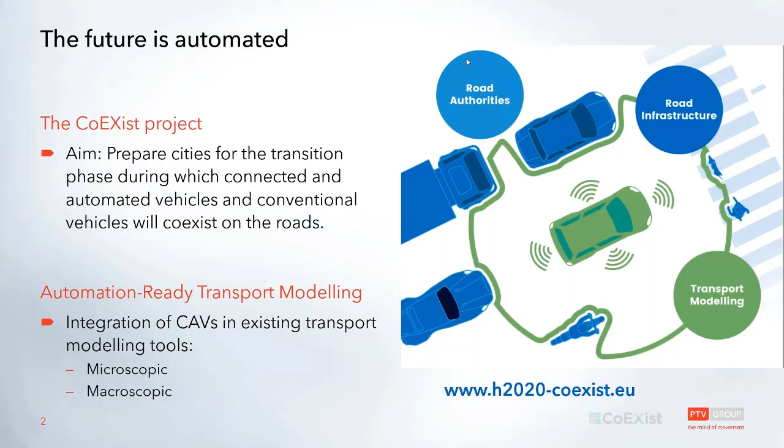Our role in the project is to enhance and improve modeling tools, both microscopic and macroscopic. In the project, we rely on 3 different information sources. First, data collection on the test track in Helmond, Netherlands, with automated vehicles performed by TASS International. Second, we received information from our project partners about expected driving behavior of automated vehicles. And third, we performed co-simulations together with the French research institute Vedecom, where an ego vehicle controlled by Vedecom's driving logic interacted with conventional vehicles provided by Vissim.

All this knowledge was used to implement new features and propose parameter values for the simulation of automated vehicles. With Vissim, we performed simulations for basic networks like simple link, on-ramp, off-ramp, lane drop, etc., and provided results for the University of Stuttgart for appropriate settings in Visum, mainly volume delay functions. After that, project cities use our software for 8 local use cases with automated vehicles.

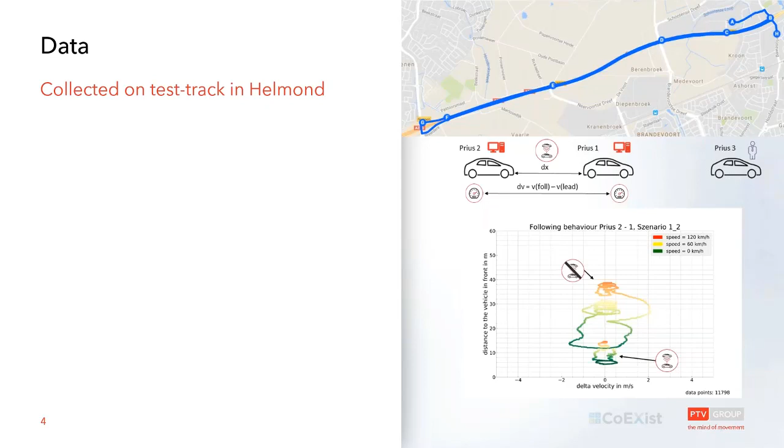The results show us that there is a linear deterministic relationship of headway and speed with car-to-car communication, an almost linear relationship of headway and speed when following a manually driven car or AV without car-to-car communication, and oscillations during the following process which are small and without much variance. With car-to-car communication, the test vehicles were able to drive safely with 0.6 or 0.3 second headway. And there is a large safety distance in drive-away behavior when there is no communication, and no stochastic variation in drive-away behavior.

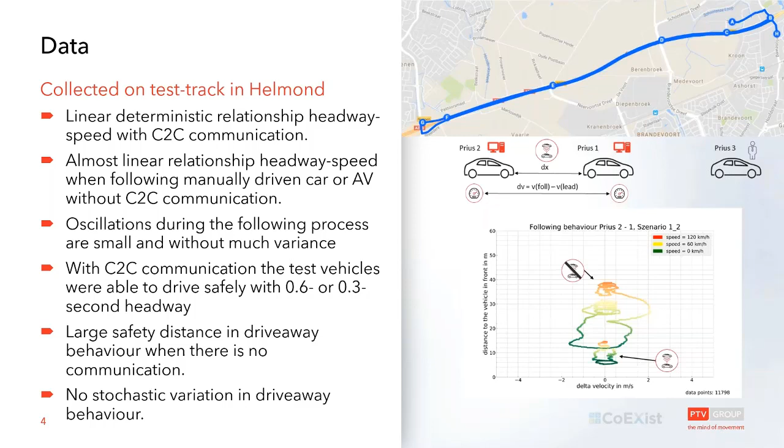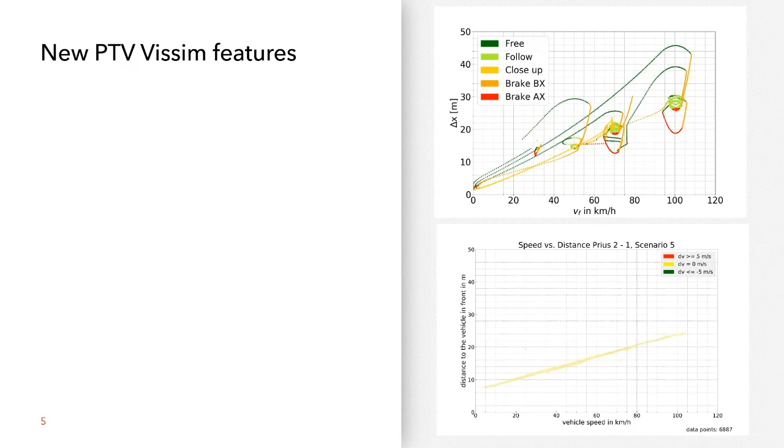The internal behavior model integrates several stochastic values indicating the spread of human behavior, which means the risk acceptance, the ability to estimate distance and speed differences, and the precision when operating the throttle and brake pedals. For AVs, deterministic values for these parameters can be assumed.

The next feature I want to talk about is sensors and equipment limitations. The idea behind it is that an automated vehicle can see the signals ahead, but only one or two vehicles in front of itself, because the sensors cannot see through the leading vehicle. In Vissim, you can specify the number of interaction vehicles and the number of interaction objects. The number of interaction vehicles is a subclass of objects. You can have situations where, because of the equipment of the automated vehicle, only the first vehicle in front of it can be seen, but not the second one.

Next feature, a big one, is platooning as a built-in feature. So you don't need scripts to have platoons inside your models. Under platoon, we understand here connected vehicles traveling very closely and safely together, possibly at high speeds. The use case is to simulate effects on general traffic, not the vehicle dynamics inside the platoon. And we assume stable driving.

We implemented also a few new behavior attributes for platooning, and you have the possibility to define platooning vehicle class specific. So you can decide if the cars will build a platoon only with cars and HGVs with HGVs only, or if you would like to have mixed platoons. Both is possible, it's up to you.

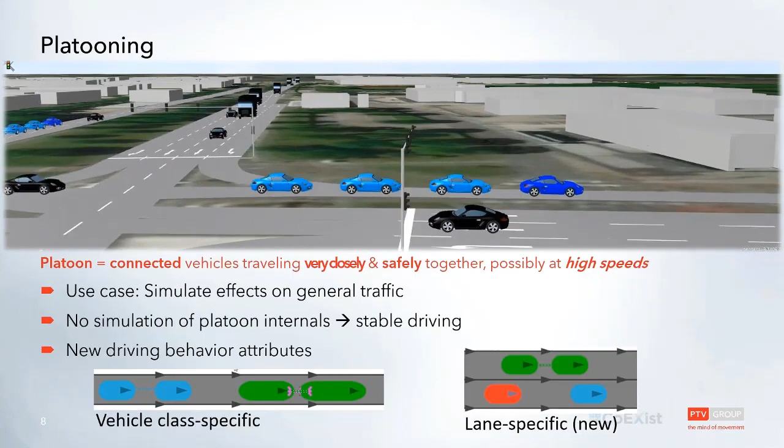It's lane specific because we implemented a new feature which allows you to define a specific driving behavior not only for each link in your model, in your network, but also for every lane on your link. So you can allow platooning only in one lane or two lanes or in all lanes in your link.

Some more details about platoons. Joining: only vehicles with the same driving behavior can form a platoon, and it's not possible for vehicles which are on public transportation or on parking routes. We implemented 5 new platooning parameters.

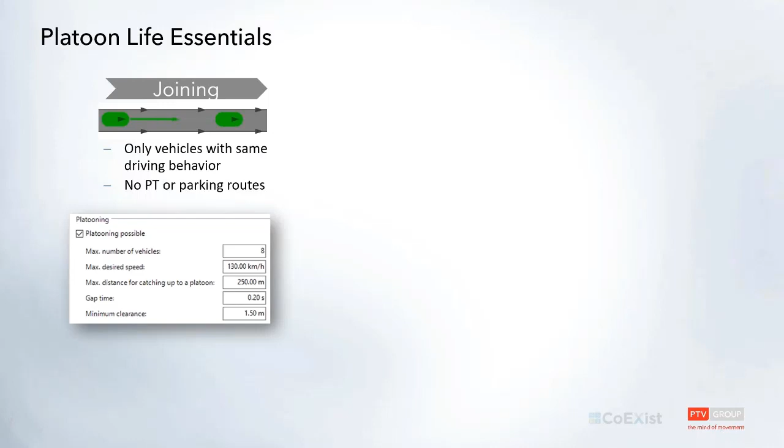First one is the maximum number of vehicles in a platoon you can set. Then you can set the maximum desired speed of the platoon. You can set the maximum distance for catching up to a platoon. You can set the gap time within a platoon and the minimum clearance within the platoon. The platoon will drive with the maximum speed you specify for the platooning or with the desired speed of the platoon leader, always with the lower of these two values.

Then driving: platoons do not do any lane changes. If a vehicle needs to change the lane, the platoon needs to be dissolved, needs to split. The vehicles keep the same distance, and there is a limited acceleration change for the platoon members. The parameters for platooning can change during driving.

When a platoon drives from one link to another link, on that second link you can have different driving behavior with different driving behavior values, so you can change the parameters or set different driving parameters for different parts in your model.

The platoon can split at signals if needed, if not all vehicles can make it on a green signal. If a vehicle needs to leave the platoon, the distance to the vehicle in front and behind will increase and the platoon will split.

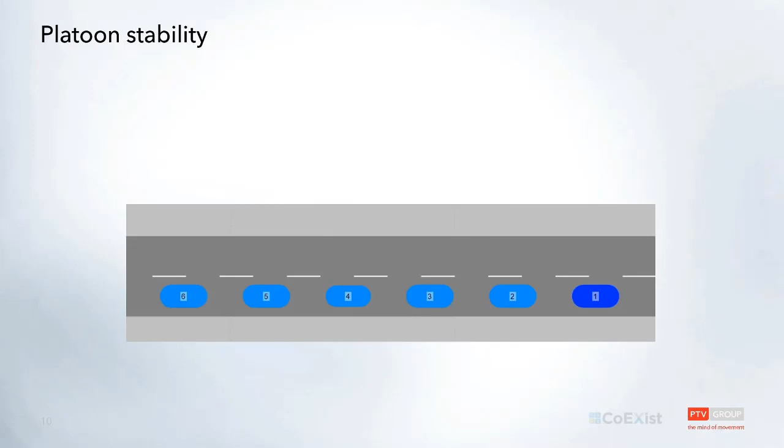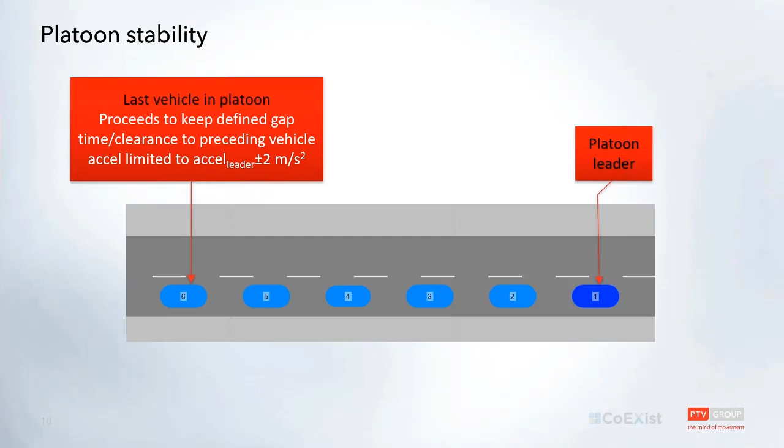How it works with the platoon stability. Each platoon has a platoon leader and the last vehicle in the platoon. And this last vehicle in the platoon proceeds to keep defined gap time and clearance to the preceding vehicle, while the acceleration for this vehicle is limited to the acceleration of the leader plus minus 2 meters per square second. And for the platoon members, these are distributed equally between the first vehicle and the last vehicle.

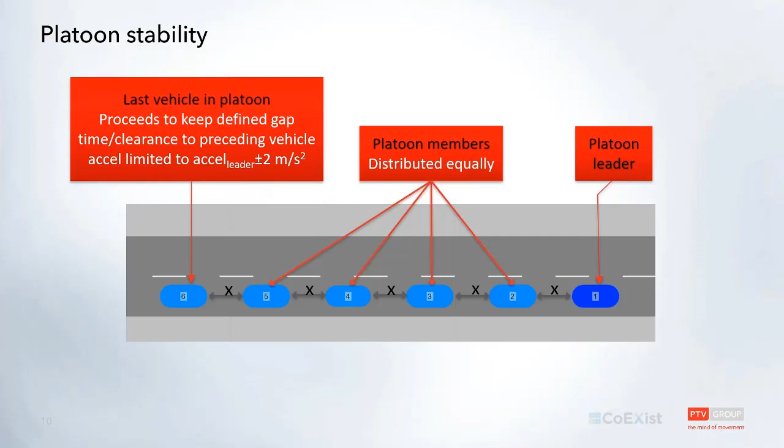And there is no explicit simulation of the communication process itself, so no packet sending or dealing with the latency like you have in the real world. We assume stable driving.

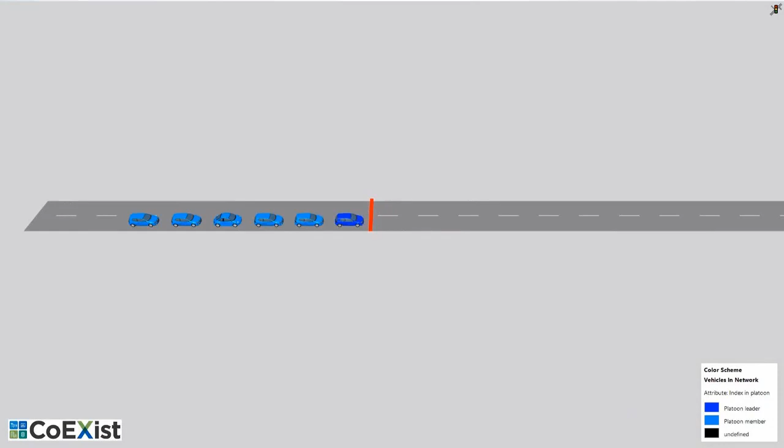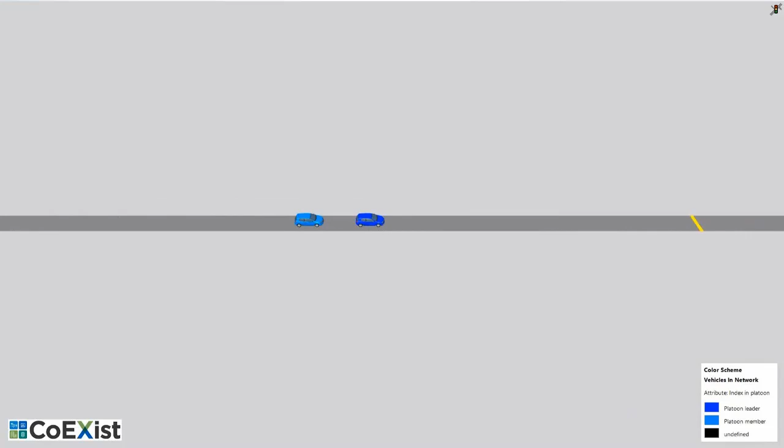This is a short demonstration of how the platoon works. So you can see that the vehicles adapt the distances based on the speed. When a vehicle needs to change the lane, the platoon splits. Then later, the second platoon can rejoin the first one. So not only a vehicle can join a platoon, but also another platoon can join a platoon.

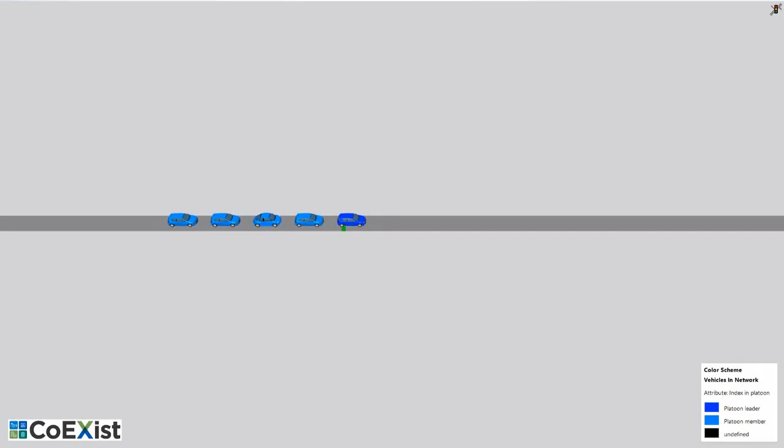Then if not all vehicles can make it through the intersection on the green signal, the platoon will split. Analogically, if they cannot pass through an unsignalized intersection where you use the priority rules, the platoon will split, and the same when the vehicles need to change the lane. And after that, when the vehicles are in the same lane again, they can form a platoon again.

Platoon attributes which are available. The first one, index in platoon, you might know already, which indicates the position within the platoon. And in the last weeks, we implemented two new attributes. The first one is platoon leader number. If a vehicle is a member of a platoon, this attribute is set to the vehicle number of the platoon leader, otherwise it's empty. And the second one is platoon size.

If a vehicle is a member of a platoon, this attribute contains the total number of vehicles in a platoon, otherwise it's empty. So if you want to do some traffic management, or you are using scripts for some more complex modeling, and you need more information from each vehicle, you can use these attributes.

A few words about the modeling framework. The goal of the traffic modeling in the CoEXist project is to assess how the impact of automated vehicles evolves during the whole period of coexistence of conventional vehicles and CAVs, from the first introduction of a small number of automated vehicles until only a few conventional vehicles remain.

And to enable such assessment of a transition period, the transition period is discretized into 3 stages here: introductory, established, and prevalent. And these stages are characterized by AV market shares, which means how common are they, AV capabilities, where can they drive, and AV driving behavior, how do they drive.

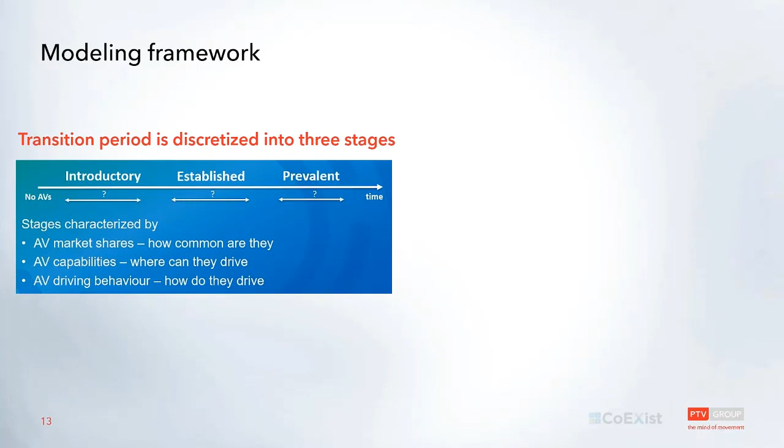And the behaviors of the automated vehicles are specified by driving logics, which are functionally defined. That is, they are specified in terms of how and where they can operate safely, disregarding which technologies make this possible. And within the CoEXist project, we work with the concept of 4 driving logics.

The first one, rail safe, is for very cautious vehicles which follow the brick wall stop concept and can only use a predefined path and always stop if there is anything on collision course. And these mostly operate in a closed environment or when they are separated from the other traffic.

And then we have cautious. Cautious means here that there is still a brick wall stop concept implemented. So they are very safe and cautious, and the gaps in comparison with the human driver are higher. And then we have the normal driver logic, which should be similar to human behavior in terms of gaps or aggressivity.

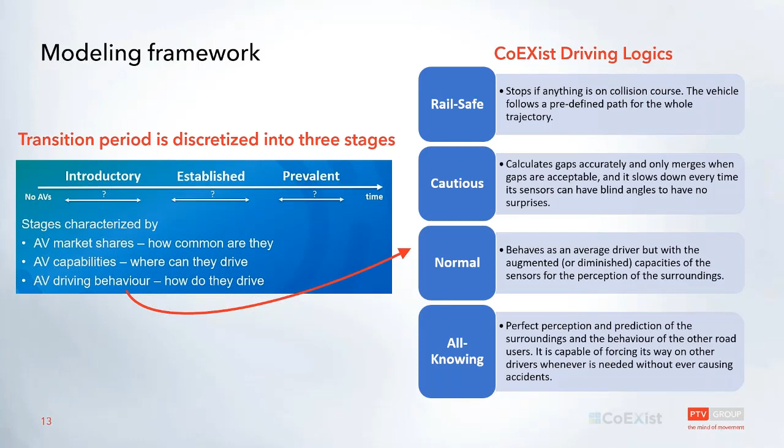There are many parameters you need to consider if you want to model automated vehicles, and the main uncertainty parameters considered in the CoEXist project are listed here. We worked with 4 different driving logics, with different AV classes, with different stages of coexistence, with different road environments and different types of vehicles.

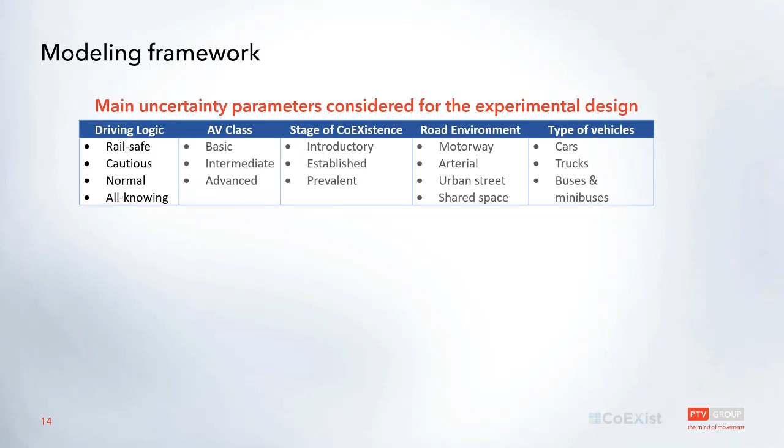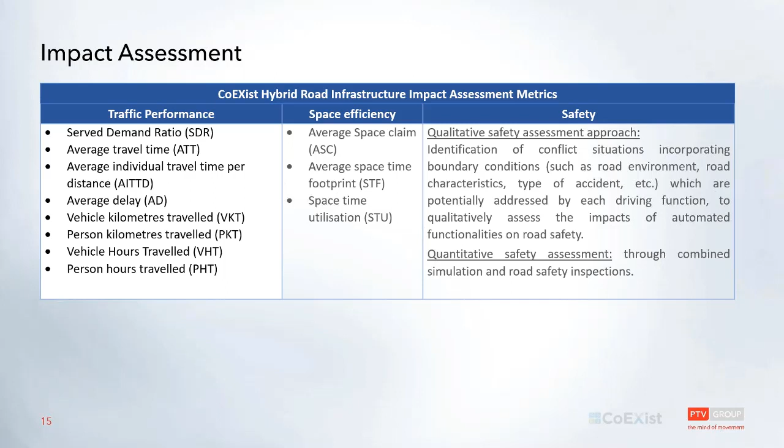A few words about impact assessment. Impact assessment was based on post-processing of vehicle records, and colleagues from VTI prepared Excel sheets for automatic processing. And besides standard traffic performance metrics, like vehicle kilometers traveled, person kilometers traveled or vehicle hours traveled, also space efficiency was defined and compared between scenarios, like space claim or average space-time footprint.

And if you are interested in more details, then I recommend you have a look at deliverable 3.2, definitions of performance metrics and quantitative indicators. This can be found on the CoEXist webpage.

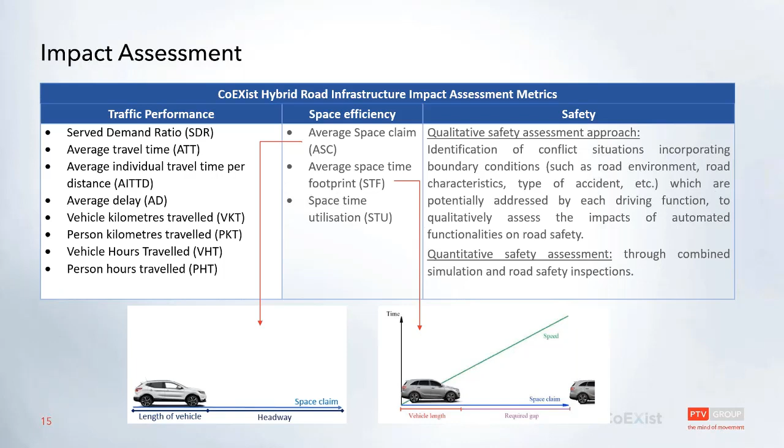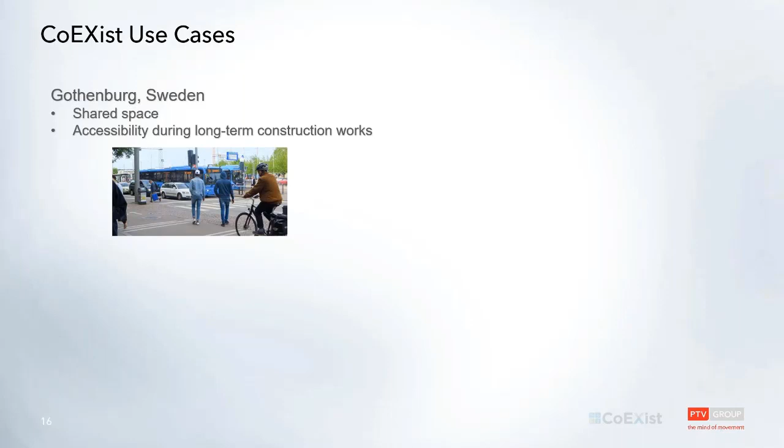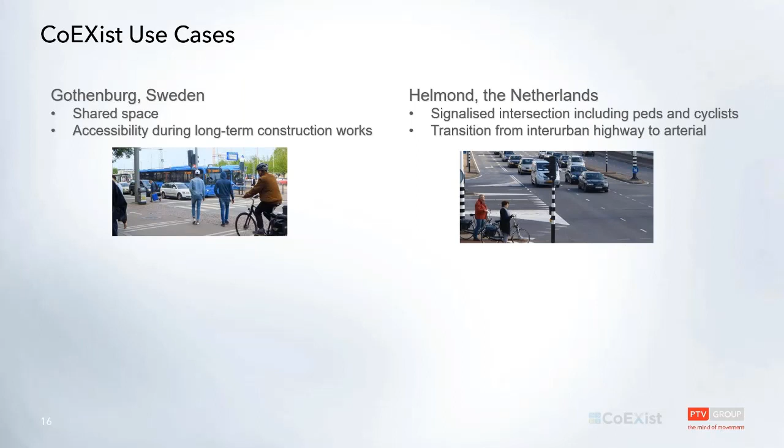The use cases we have within the CoEXist project: in Gothenburg in Sweden, a microscopic one with shared space, and accessibility during long-term construction work, that was a macro use case. In Helmond, in the Netherlands, we had two microscopic use cases, signalized intersections including pedestrians and cyclists, and transition from interurban highway to arterial. In Milton Keynes, waiting and drop-off areas and priority junction operations,

microscopic use cases. And in Stuttgart, we had macroscopic use cases using Visum and additional scripts to investigate impacts of CAVs on travel time and mode choice and the impact of driverless car and ride-sharing services.

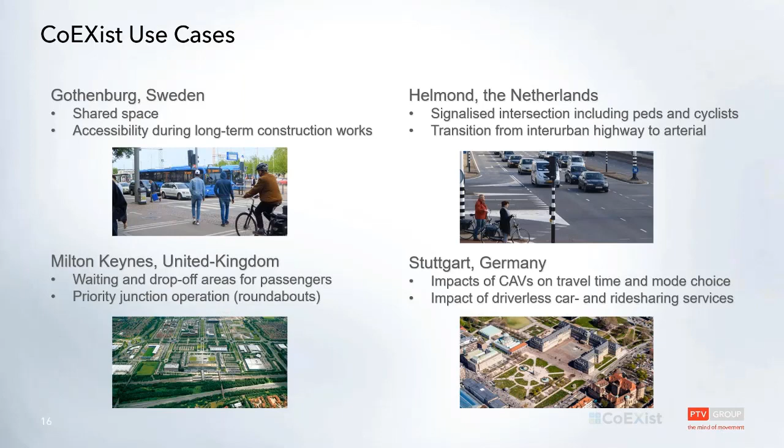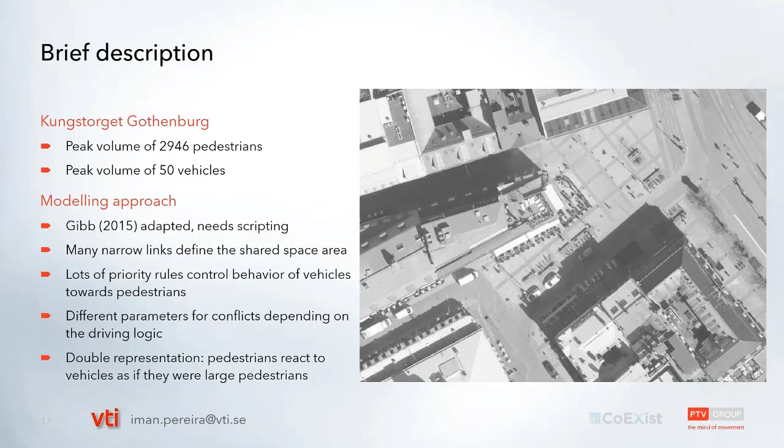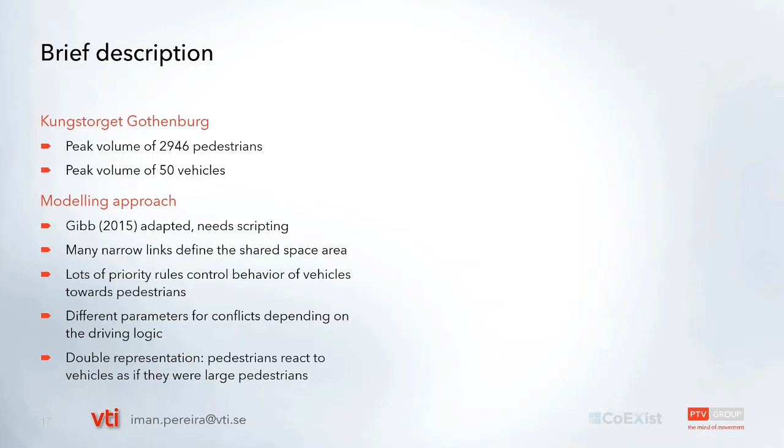From all these use cases, I picked just one because I think it's an interesting one because of the modeling approach, and that's the use case for the shared space in Sweden. Our colleagues from VTI adapted the approach from Gibb from 2015 using scripts. And they defined a lot of priority rules within the model, also using scripts.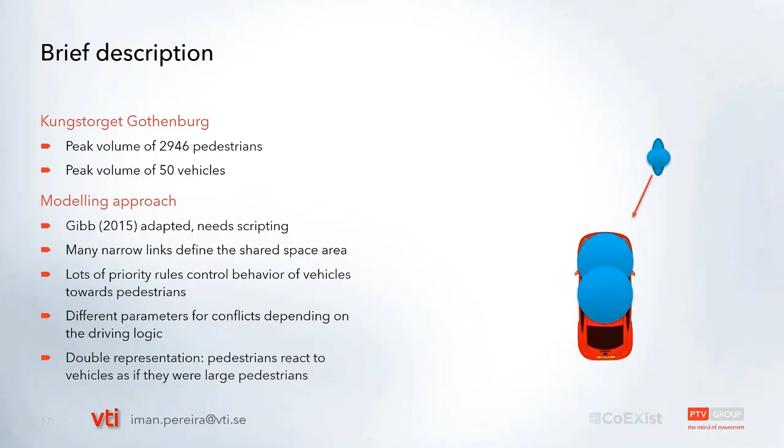And they used double representations of a vehicle. So a vehicle is present in the model as a vehicle, but also as two fat pedestrians. That's why it's called double representation. And they use this approach because then you can also use the social force model and you can have not only vehicle-pedestrian interaction, but also pedestrian interaction. And these two big pedestrians are used to model the vehicle.

For the interaction with pedestrians, they use a lot of priority rules which were created by scripts, and they use different parameters for these priority rules for a human driver and for the driving logics for automated vehicles. So there were values for rail-safe logic, different values for cautious logic and different values for normal logic.

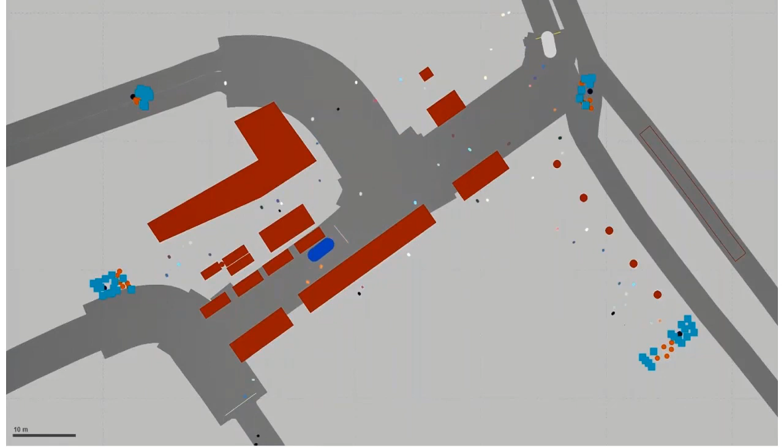And at the end, it can look like this. You can see the shared space area where pedestrians are not just crossing the road, but they can move also in the same direction as the vehicles or the opposite direction towards vehicles, and it works very well. So this was an interesting approach.

And we implemented also a lot of improvements for our APIs, for our interfaces, for the driving simulator interface and for the external driver model interface. And I don't want to explain them in detail. You can find a description in the documentation, but the important message

is that the driving simulator interface allows connecting Vissim to a driving, cycling, or walking simulator, and that simulator can either be simulator hardware used by a human or a piece of software representing the algorithms of a CAV or multiple CAVs. So if you have own algorithms you are developing and you want to test how the vehicles will interact with the conventional traffic, this is the way you can go.

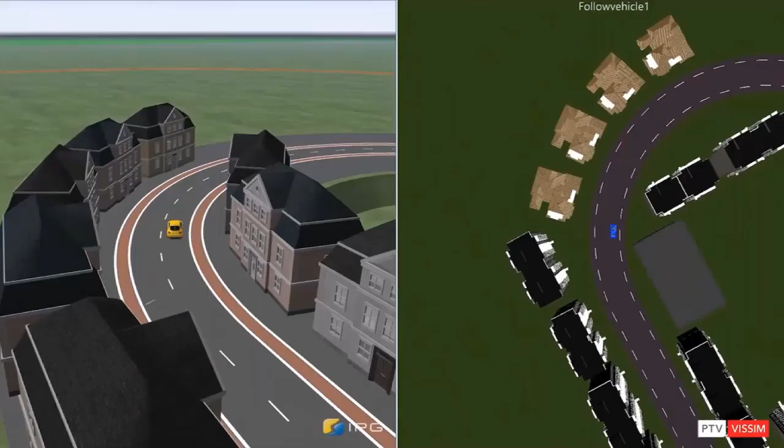There is also a possibility to use the external driver model interface, which provides options to replace the internal driving behavior by a fully user-defined behavior for some or all vehicles in a simulation run. So what does it mean, or how can it look? There is a short demonstration of a car simulation.

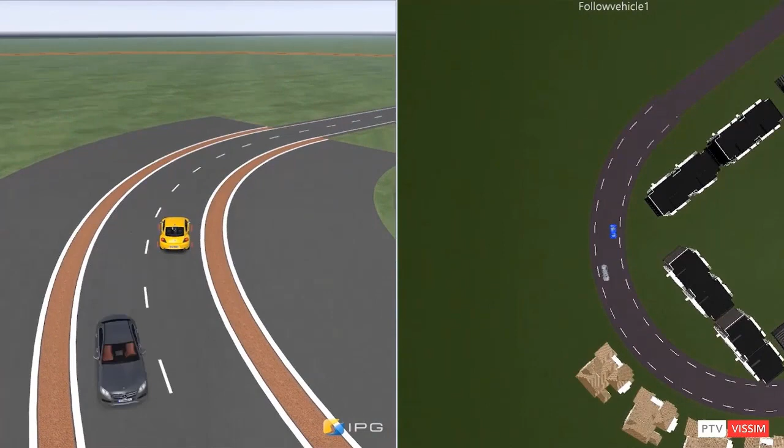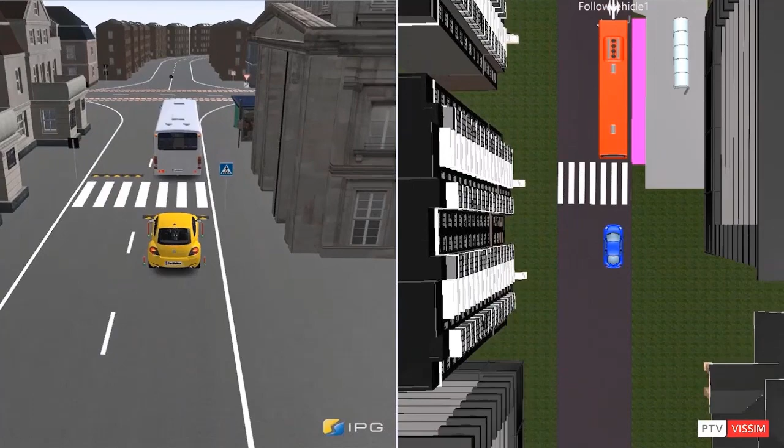On the right side, you can see the Vissim network, the Vissim model. On the left side, there is a model in CarMaker from IPG. CarMaker is a software which can be used to model the vehicle dynamics and also all the sensors you need for automated vehicles. And when you connect these two simulators, then you can see how your ego vehicle interacts with the conventional vehicles provided by Vissim, and how the Vissim vehicles interact with the ego vehicle here.

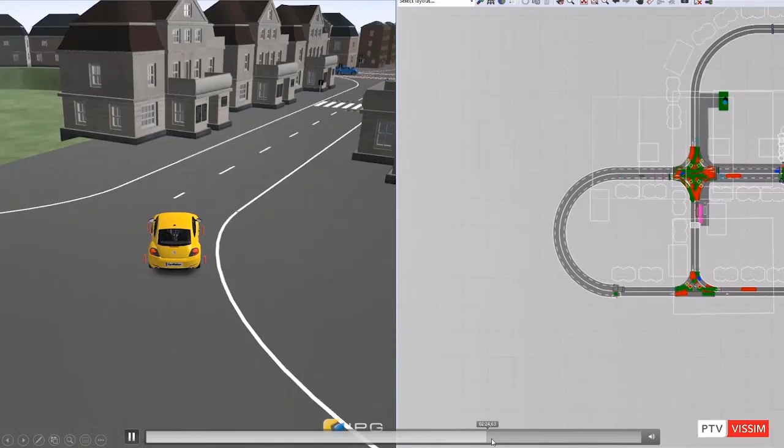You can have also PT lines there, buses, pedestrians, different intersections, and you can investigate how your algorithms perform in interaction with surrounding traffic.

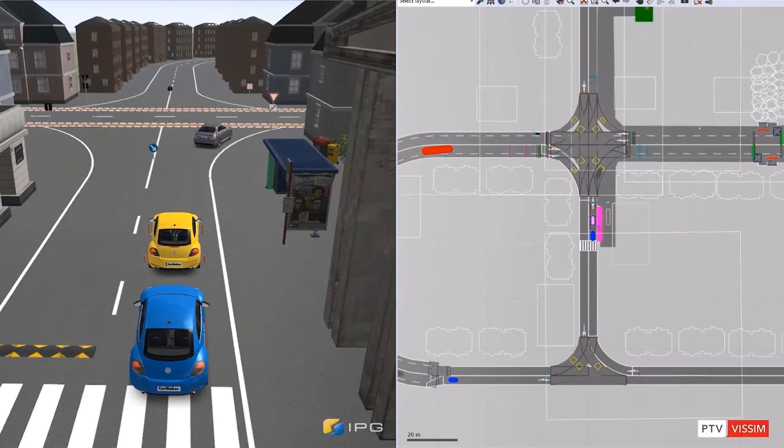Lessons learned and recommendations from the project. New features were implemented in the traffic modeling tool to allow simulation of automated vehicles, but there is still a big responsibility of the modeler to define the assumptions in an appropriate way about how vehicles should or will behave. Driving logics: there is much research ongoing, but there are still no fixed rules or standards and high uncertainties.

CoEXist delivered the tools for a structured approach of assessing future scenarios and handling uncertainties, like the automation-ready framework, the modeling tools and the impact assessment methodology. And the tools developed enable assessment of innovative infrastructure measures, but measures tested show mobility improvements mainly for high automation and penetration levels. And use case simulations show potential deterioration of urban mobility before promised benefits of CCAM are seen. Cities should plan for the transition phase.